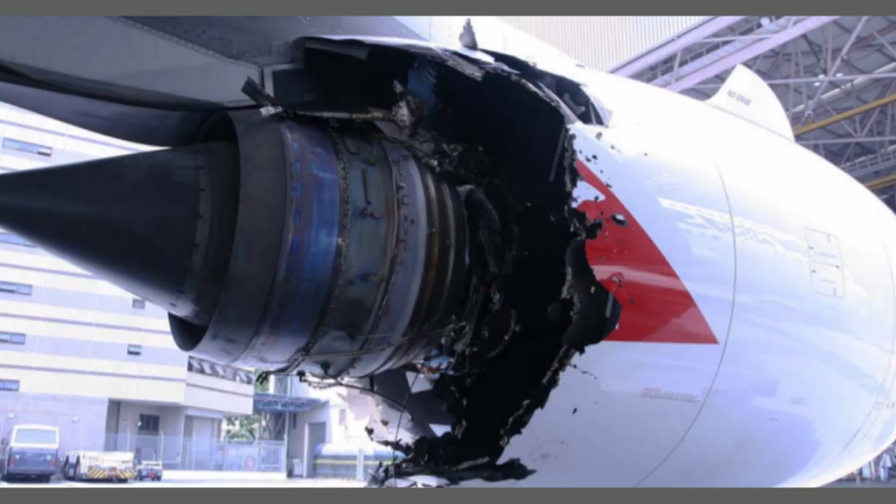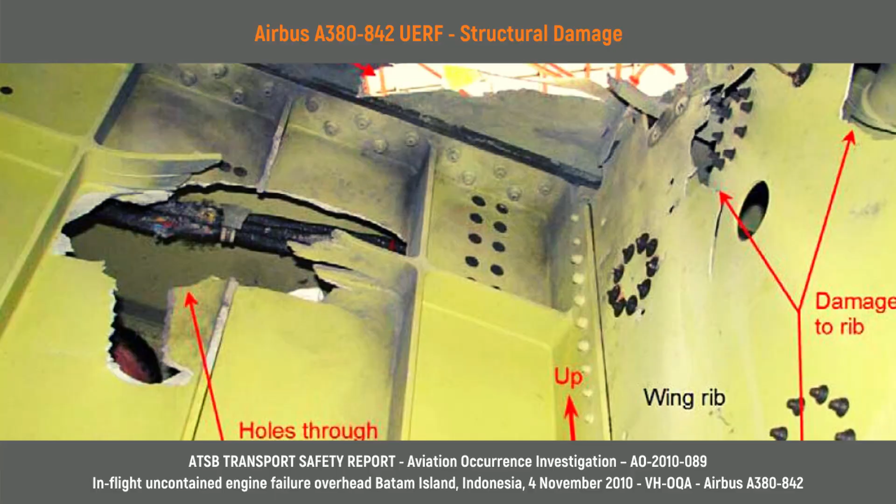And what is the uncontained engine rotor failure analysis? The engine contains many high energy rotating parts. The failure of these parts into fragments - imagine the fragments escaping, puncturing a hole in the engine casing and potentially damaging the aircraft. The analysis covers the potential damage to the aircraft, potential damage to the systems that are impacted by the fragments, and then also being able to understand the residual risk remaining after the mitigations for the impacts are taken. With engine rotor burst, you can't completely eliminate the risk, so you have to understand the remaining risk and see if that remaining risk is within an acceptable level.

So can you describe what are the high energy parts on the engine that you have to consider? Yes, the engine has different sections. There's a fan section, a compressor section, the combustor section, and then the turbine section at the rear of the engine. All these sections contain rotors. The rotor is the disc - there's a rotating disc in there that the fan blades are attached to, along with the compressor blades and the turbine blades, within these different sections.

Now these rotating components have a lot of high energy. They're under a lot of pressure as the air is compressed going into the engine. They're under high temperature in the combustion section and then at the turbine section as well. So these components can fail, and they can fail in different ways for different reasons. One of the most common ways for the rotors themselves to fail is because of metallurgical issues and metallurgical anomalies within the actual base metal, within the material.

Also the blades can have metallurgical anomalies, inclusions. Depending on how they're manufactured, there can be manufacturing defects in how the base metal is treated, the heat treats and so on. That could initiate failures at the intergranular level of these components. Also, the failures can be precipitated by damage either during production or maintenance.

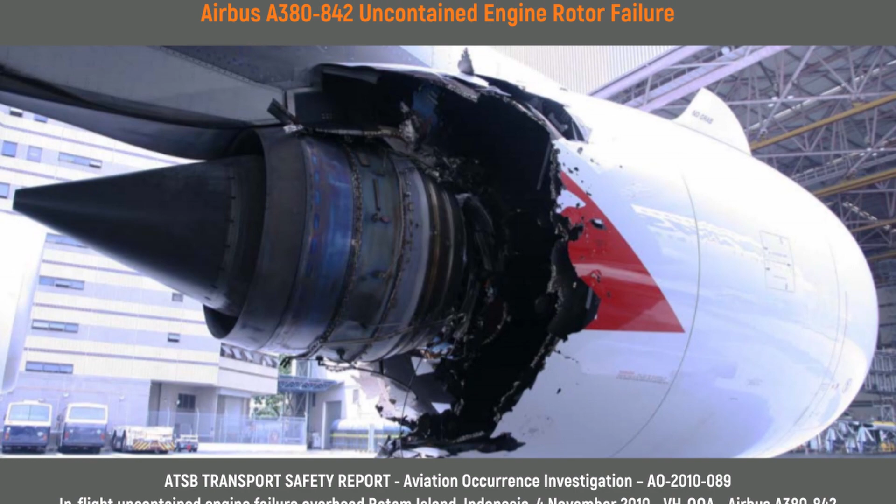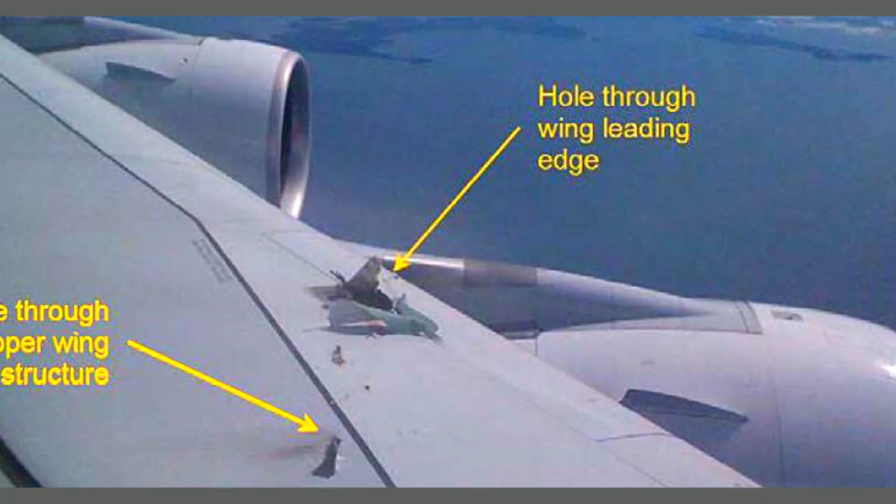And that was because an oil tube failed within the engine. Oil was leaking internal to the engine, caused the fire, and the fire damaged the rotor to the point where it split. The rotor couldn't handle the thermal loads and it broke apart. Okay, so that's another type of failure that can happen.

Another root cause of the failures. And you're talking about the engines itself or themselves, but what about other rotating parts in the aircraft? Do you consider these parts as well?

Yes, the aircraft also has other components that have high energy rotating parts. Components like pumps, fans, generators, cooling fans, they're high energy rotating parts. Now the energy is nowhere as high as the energy that would be in a fragment from a rotating disc or fan blade, but they still must be considered.

And the way this is done is by showing compliance to a specific regulation, which is 1461. Compliance can be shown by showing that the fragments can be contained within the casing or the housing of the unit itself. And also,

another way compliance can be shown is when the part is installed, if failure of the part occurs, and if the high energy parts do escape, like the tiny cooling fan blades and so on, if they do escape, they don't cause a hazard to the aircraft. So there are a number of different ways that compliance can be shown for those components to the regulation 1461.

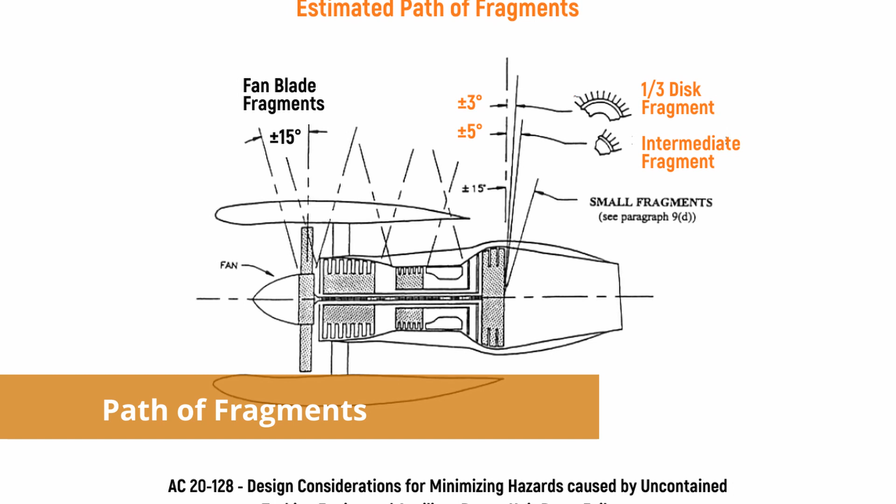So it may be ejected up to 3 degrees or up to 5 degrees forward or aft, so you have either a 6 or 10 degree spread angle there that you have to look at. You use either the 3 degree or the 5 degree depending on which model you're using, and I'll explain that in a minute. You would look at that individual rotor fragment based on the size and the dimensions of the fragment.

For the 1/3 disc, you would look at that trajectory as it extends out into space through the aircraft. You understand what systems are impacted and try to mitigate.

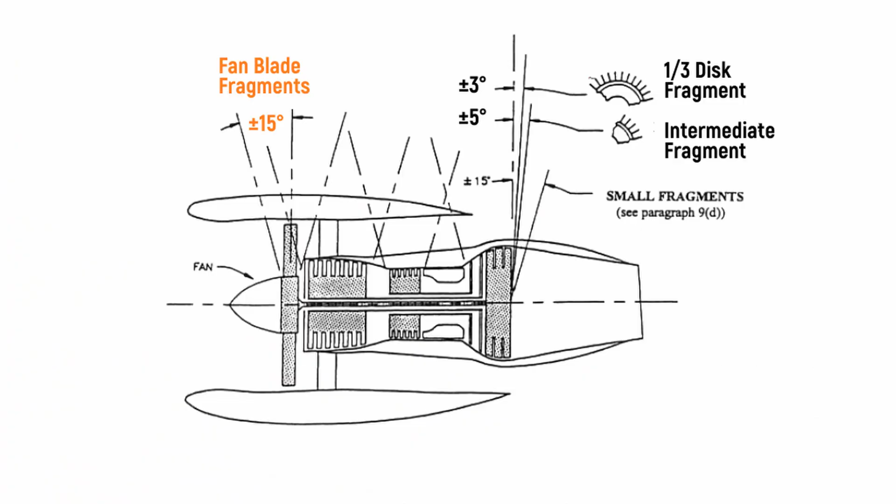So with that, we'd also look at the fan blades. The fan blades can be ejected. The fan blade fragments from damage can be caused by intergranular failures, or just from impact due to FOD or any of those reasons. Those fragments can be ejected forward of the engine. So when we look at the fan blades, we look at a trajectory that's 15 degrees forward.

So you consider a little bit more spreading, since it's higher.

Now, even though with the fan blades, during the course of the engine development, the fan module is tested to contain the fan blade failure. So the engine module, the engine supporting structure, are tested during engine development to show that the retention system, the containment mechanism, can contain the fan blade. But as I mentioned, the fragments can be ejected forward.

Okay, and what about APUs? Do you have to do the same analysis, or are they considered the same as engines? Yes, so for APUs you have to do an analysis. Now, the analysis depends on what the manufacturer of the APU did at their end. If the manufacturer has shown that the large fragments can be contained within the APU housing, then as an aircraft developer, all you have to do is look at the small fragments.

But using the same logic, the small fragments will be ejected within a certain spread angle, and it can potentially damage systems, because the APU is towards the rear of the aircraft. The fragments can potentially damage the flight control surfaces to the rear, such as the rudder and the elevator, and any systems that may be back there. So that has to be assessed, and that's part of the UERF analysis described in AC 20-128A.

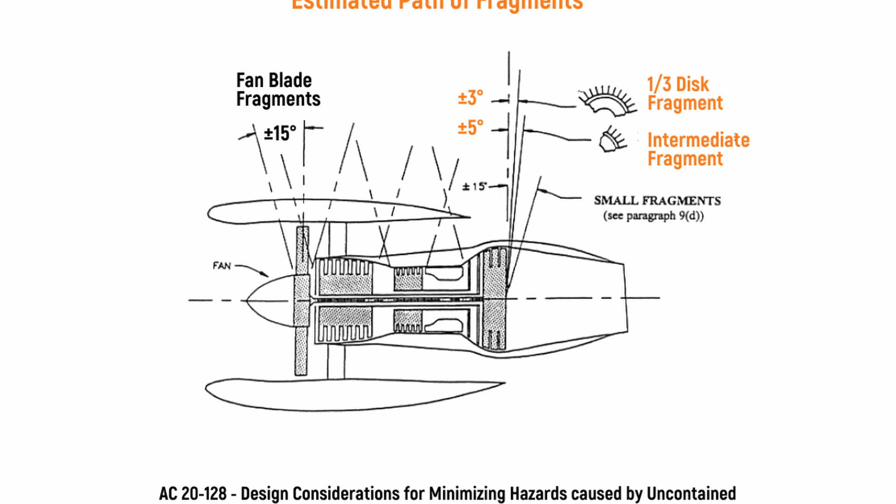If you change that spread angle to plus or minus 5 degrees for the 1/3 disc, and then you take that across all of the discs of the engine, then you don't have to do the assessment for the intermediate fragments.

Oh, okay, so there's kind of a simpler way to do the analysis if you consider this alternate model, which seems to be more conservative, right? Yes, and it's a little bit...

Given the fact that during the course of aircraft development, there are a lot of changes and reassessments that have to occur based on changes in aircraft layout, changes in component functions, and different failures that can occur, driven by different changes in different hardware, relocating hydraulic lines, wire harnesses, and so on. Being able to continually reassess from a rotor burst perspective, the impact of that is something that's ongoing. So if you just use the alternate model, which is the 5-degree model, it might make it a little bit easier. Some manufacturers may find it's easier to do that.

Okay, so now that you have at least chosen a model and defined your threat areas due to the trajectories of your blades or fragments, what's next? Then what do you do with this information? Then afterwards you would begin your safety assessment, your safety analysis.

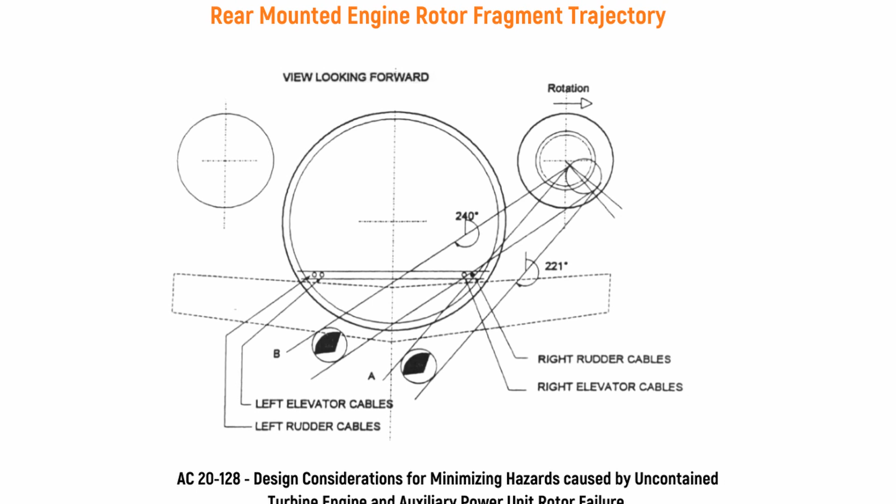Then you see if another system is also impacted with that same trajectory, and if it is, whether that can potentially cause a catastrophic failure condition.

Now, in addition, you would have to mitigate that risk either by changing the function of the system, by separating and adding redundancies, making sure that they're separate at least by the dimension of the disc, so that one disc fragment can't hit both at the same time.

Adding some kind of change or changing the signals that go along the wires, and so on. There are different things you can do to mitigate that risk.

But then after that, you would try to continually minimize the risk until there's nothing that you can practically do that would prevent you from ending up at a catastrophic failure condition.

So you keep doing the iterations, moving things around, and also ensuring that other rotor burst fragments don't negate the activity you've just undertaken to mitigate the risk.

Okay, so it's like an iterative process. Yes. So how many times do you run this process throughout the development?

Well, you start off by understanding what you have, your baseline, and then as you make changes, you would look at those changes individually—changes in the components, changes in the functions of the components, locations, and so on. You want to continually show that you've done everything you can to mitigate the risk of a catastrophic failure condition.